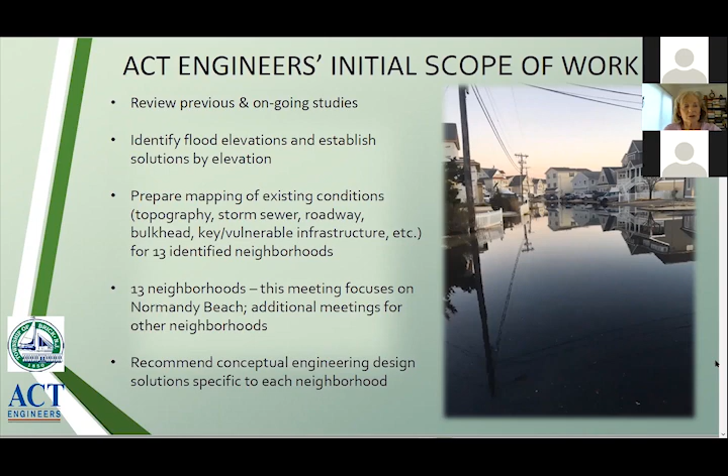So tonight's meeting is focusing on the Normandy Beach section of your township. On the next slide, you're going to see the 13 study areas that we're going to be focusing on for the township. And on the right-hand side of the picture, you see the areas specifically identified.

And now I'm going to turn this over to Jeff, who's going to talk more and further the conversation. This is Jeff Richter from ACT Engineers. As Carol indicated, on the left side of the slide, you can see the 13 study areas that we are reviewing.

Normandy Beach would be number 3 there. These are just in no particular order.

On the right-hand side is an aerial photo of the township. The areas outlined in yellow represent the 13 study areas, and next to each one is a number and/or a number with a letter that corresponds to the study areas listed on the left side of the plan. The areas in red are the low-lying areas of the township subject to flooding, in this case to a flood elevation of 1.4. I realize there is flooding in Normandy Beach at this point, but due to the large scale of this map it doesn't show up, as it doesn't in some of the other communities at this scale. So if we could go to the next map.

Jeanetta: You meant blue, right, Jeff? Jeff: The areas in blue. Sorry, what did I say? Jeanetta: You said red. Jeff: That's red? Okay, the blue areas, I'm sorry. Jeanetta: Thank you. Blue for water.

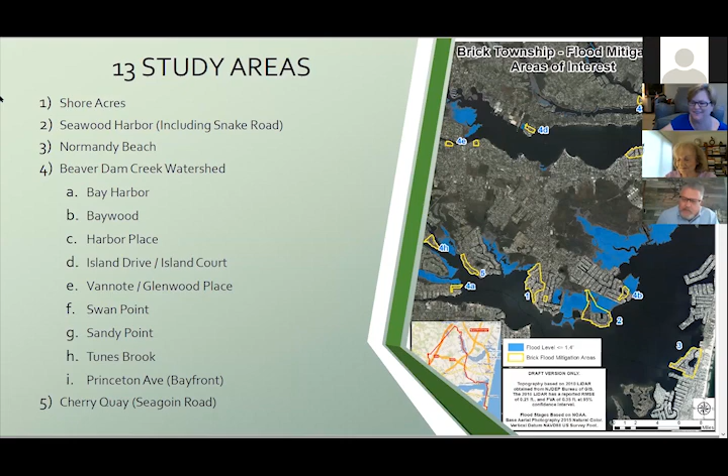Okay, next slide. The next slide shows two of the data sources I'm sure the neighborhood is familiar with: Stevens Institute of Technology and NOAA, which is put out by the National Weather Service.

I wanted to go over this slide so we can understand what datum we're talking about. Datum refers to topography, what datum you're using for your topography. The Stevens Institute of Technology datum is NAVD 88, which is the current datum used by surveyors throughout the state when collecting topography, staking out new infrastructure, and so forth. It's the recognized datum for surveyors.

The Stevens Institute of Technology uses that datum for their flood gauge information. The particular gauge shown on the left is from Stevens Institute from this past few days. You can see it was 6:10 through 12 o'clock today, I believe. The flood height in red is the confirmed, observed elevation, and it's under 2 — actually 1.76, and I'll tell you how I know that when we review the next one. The purple is the projected, and the gray is the uncertainty in the projections.

Now the NOAA gauge on the right — they're both from the same gauge, both taken from the Mantoloking gauge on Barnegat Bay. The only difference is NOAA reports it based on a gauge elevation of 0, which is different from NAVD 88 by 0.4. You'll notice both say major flood, moderate flood, minor flood, but they're off by 0.4 feet. So if you're looking at the NOAA gauge in reference to NAVD 88, it's going to be 0.4 less. You can see it says for today the peak was 2.16 feet on the NOAA gauge, but in surveyor's terms, NAVD 88, it would have been 1.76 as shown on the graph on the left. I know that might be a little confusing, but I want to make sure everybody understands that for tonight, everything we're going to show as far as conceptual is based on NAVD 88, and what you experienced today was roughly 1.76 in that datum.

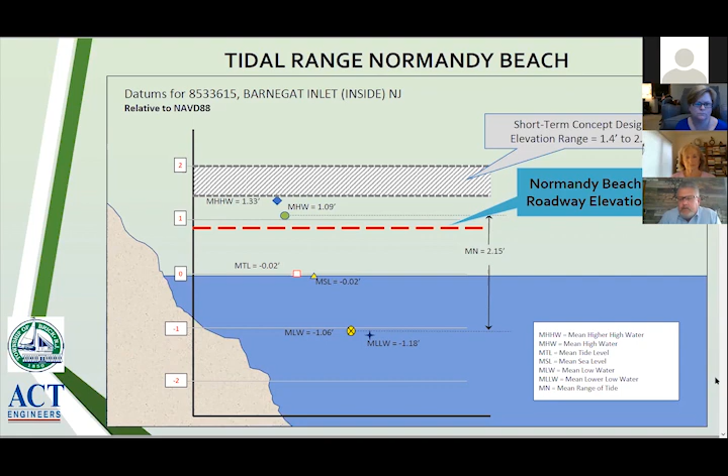So if we could go to the next slide. This shows generally the tidal range for Normandy Beach. You can see the mean high water is 1.09 feet, and the mean higher high water is 1.33 feet. At Normandy Beach, the lowest road elevation is 0.85 feet. So you can see that even at mean high water there's flooding in the street. For what we're looking at for the short-term conceptual design, the elevation would be 1.4 to 2.0 for any infrastructure to get above the mean high water line. Again, these elevations are all in NAVD 88 as we just talked about on the prior slide.

So we could go to the next slide, Janelle. This slide is also taken from the Mantoloking tide gauge. Along the bottom are the years from 2006 to 2020, and along the left side vertically is elevations, again in NAVD 88. The blue represents the fluctuation in the tide, with the high tides peaking at the top. The peak of the low tides is below the 0 line in some cases, but that's not relevant for flooding. As you can see, we've highlighted across the top several of the peaks that have occurred and the dates they occurred. I'll show you later data that shows they're occurring more.

There is a gap you'll notice between the end of 2015 and the beginning of 2017 when the gauge was out of service. This also doesn't represent any significant storms that occurred during these periods. Once the gauge is taken out of service, or they don't post the readings because of the potential for error, there are some other storms, like hurricanes or Superstorm Sandy, that just aren't shown on this, and they obviously go above what the highest storm is.

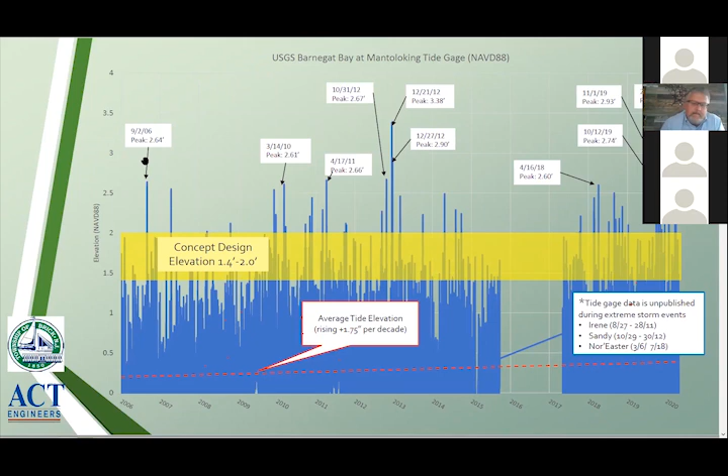You'll notice from the peaks here that the peak on 12/21/12 was 3.38, just under 3.5. That was right after Sandy. Sandy was up around 7 per some of the information, just for your records. The tide elevation rises roughly 1 3/4ths. Based on this data, the average tide has risen roughly 1 3/4 inch per decade. Next slide.

Jeanette, okay. All right, so in our review of the neighborhoods, we did a community flooding impact assessment. We've got two tables here. The first one, let me define: you'll see in the tables the heading with the numbers below it says number of dwellings with compromised access. What we mean by compromised access is dwellings that either have water in front of them on the roadway, or would have to travel through a flooded roadway in order to exit the neighborhood. So you could be in a portion of the neighborhood that's dry, but if you have to drive out through flood to get out of the neighborhood, you're considered compromised access.

Taking that into consideration, we looked at the impacts less than or equal to a flood elevation of 2.0 feet, again NAVD 88. Our short-term design approaches would address under less than or equal to a flood of 2.0. You see Normandy Beach is listed number 2 there with 153 compromised access. On the right is the long-term design approaches for impacts greater than 2 feet, up to a 3.4 foot flood elevation. Again, Normandy Beach is number 2 there with 198 compromised accesses.

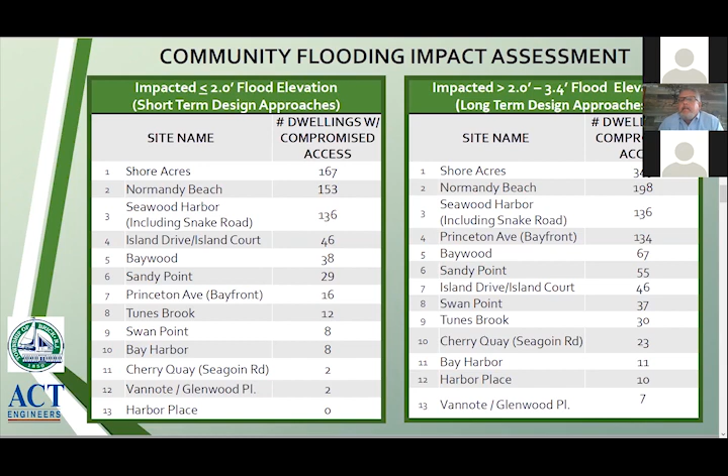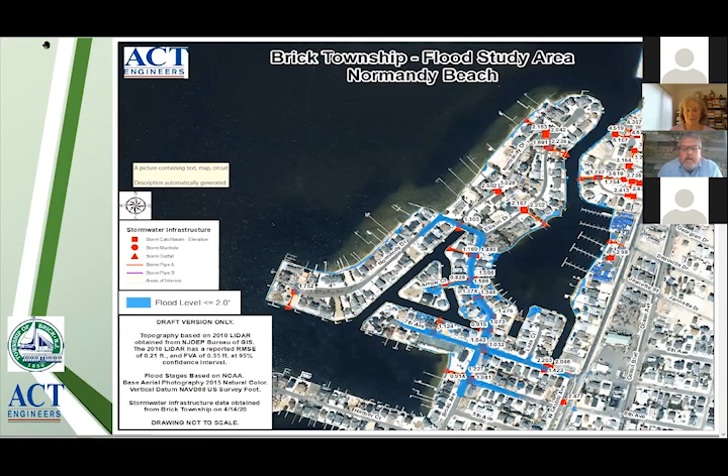This is basically the same slide with the flood elevation of 2.0. The yellow represents the low-lying roadways that are below elevation 2. Again, 2 is our projected design range.

Alan Rothman, 318 6th Avenue: My question is, the roads that you're talking about raising on this slide would be the roads in the yellow? They would be the roads that are low-lying and to get above flood would need to be raised. So the ones that are highlighted in yellow on this slide? Yeah, to get above 2, they would need to be raised. They're the low-lying roads.

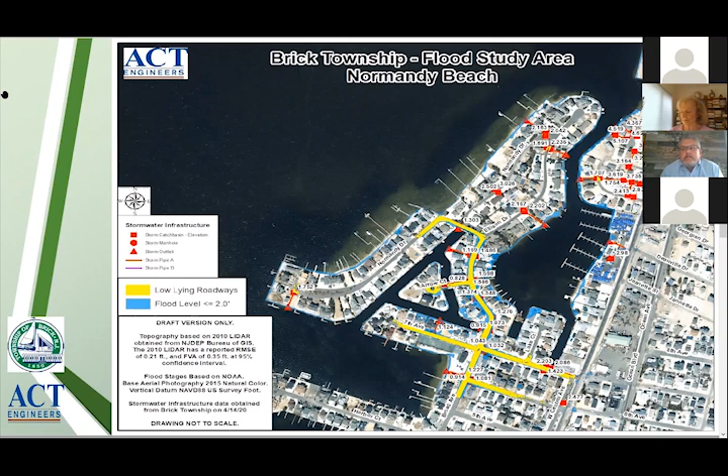For conceptual mitigation design approaches, the short-term design approach would be to design to elevation less than or equal to 2. That flood occurs approximately 1,500 plus or minus hours per year at that elevation. To address that, conceptual mitigation measures would be to install check valves, raise roads, sidewalks, driveways, handicap ramps if that portion of roadway or sidewalk was raised, raise select bulkheads, and install additional drainage infrastructure where necessary. Under the long-term design approach, this would be elevations greater than 2, above the yellow line shown on the other slide. It floods above that approximately 60 hours per year. Long-term design approaches would include raising roads and properties, raising bulkheads, installing additional drainage infrastructure, and possibly pump stations.

Rich Morano, 548 Broad: Could you give an example of additional drainage infrastructure? Additional infrastructure could include adding additional inlets, replacing or increasing the size of pipes - those types of measures, because when you raise the road, you may need to add additional infrastructure to pick up the water at more locations, since a lot of the areas are flat and there's not a lot of pitch.

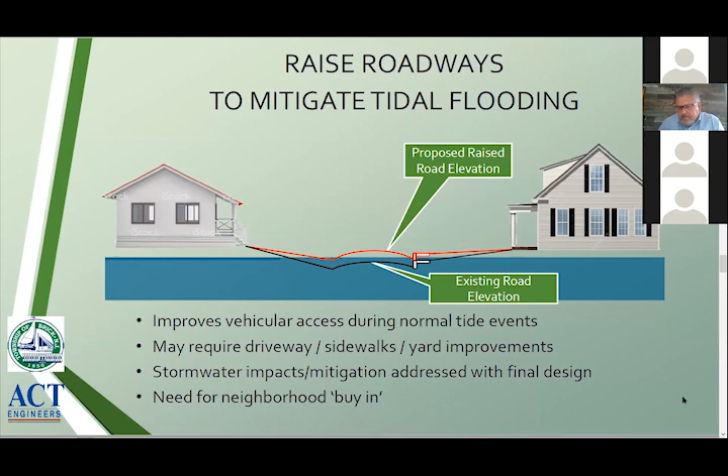Okay, next slide. So, one question here. Sure, who's asking? It's John Armstrong.

Hi John. So does that mean, since different properties have different current elevations, the raised road would be designed according to the adjacent properties? So it would be higher in some areas and lower in others, so you don't inundate those lower properties. Is that what you're saying?

Yeah, there's going to be a limit to how high you can go if you have properties that are very low. That would have to be worked out at final design. There might be ways to address that in the design.

Well, you might have to raise a portion of the property. You might have to create swales or something to get the water to go around the home. It would really need to be looked at closely. The best solution would be to raise the garage or dwelling. It seems to be more the garages that are lower, more so than the homes.

The next one is just, the slide just shows... Excuse me one minute, this is Stephen Timoni again.

About the water coming up from the groundwater, has that been determined by anybody at the township or by your engineering firm? Are we experiencing ground level water coming up? We have not investigated that. That was not part of our task. Wait, that's not part of your work order?

Part of our work is to come up with conceptual designs. That would be part of a design, investigated as part of a design. Okay, well if anybody understands that, they're smarter than me. Wouldn't you come up with a conceptual design after figuring out the source of the water? So you would have to know whether the water's coming up through the ground, why, before you create a solution. We're proposing conceptual solutions that would need to be investigated further based upon additional surveying and geotechnical information. Wow.

So basically this is a schematic drawing that we're looking at, okay yes. So we are years away from any type of solutions that will have any future impact on the neighborhood. I can't answer that. The results will.

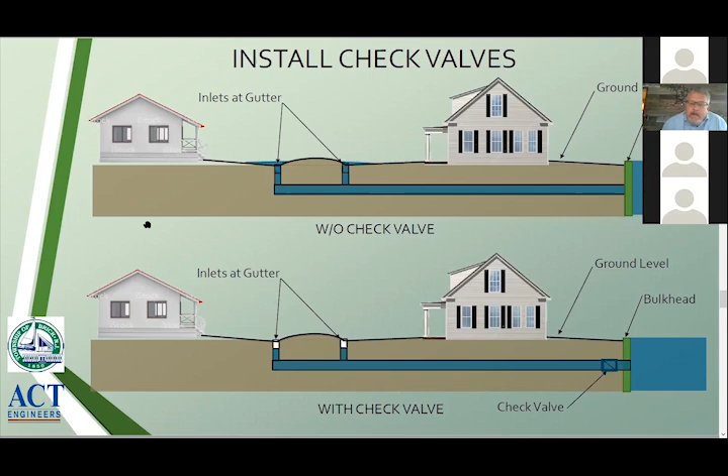It appears to do that. We don't have elevations on all the bulkheads, but it only takes one area. Go back to that slide—3.4, way at the beginning. That's why we picked 2 as a design elevation to get the roadways elevated. This is what it would look like at 3.4, which it's gotten close to in the last 14 years.

So in the last 14 years, a pretty good span in most people's lives, accounting for hurricanes, the bay has only breached the bulkhead one time? Well, I don't know if it could have been more times, because there are some low areas—we don't know how high the bulkheads are.

Has water ever encroached upon the tennis courts here? Why are you asking him that question? I don't know. Has water ever encroached upon the Bay Beach house here? No, not even during Sandy. So why then, if you're not having water encroaching over bulkheads onto the Bay Beach house—well, let me ask you this.

Has anybody from your company been in this neighborhood? Any of the partners in the company? Carol, have you been here? Absolutely, Carol's been there. And so has the president, Rob Corkage, and some of our other crew. It's just that Jeff is a master designer and an engineer, but he has not had the opportunity.

That's fine, I just wanted to know if anybody else had been here. So one time in 14 years the bay water has breached bulkheads at the beach, but many, many times I have water on my property, approaching my front steps and my garage. I own one of the oldest houses—it was built in 1926, and we didn't put it on stilts.

But I still have water around my property all the time. The storm drains are filled to the top every single day, 365 days a year. So they don't have any pictures. This doesn't have anything to do with the fact that the storm drains might be ineffective right now.

They clearly are, you moron. Jeez. Somebody should mute themselves. Did somebody just call me a moron? Sure. Where's the third one? I get cut off and then somebody calls me a moron, okay?

So I still have water in front of my house, and I've had water in front of my house for the past 7 years, okay? And nobody's done a damn thing to correct it. And I don't hear a plan to correct it. I hear a plan to raise roads that's gonna make water come into my house, okay, and continue to have storm drains that are ineffective. We have evidence today, by admission, these storm drains don't work. The water does not drain out into the bay. Why do we still have these storm drains? Please explain that to me. Because you know what? Maybe I am a moron.

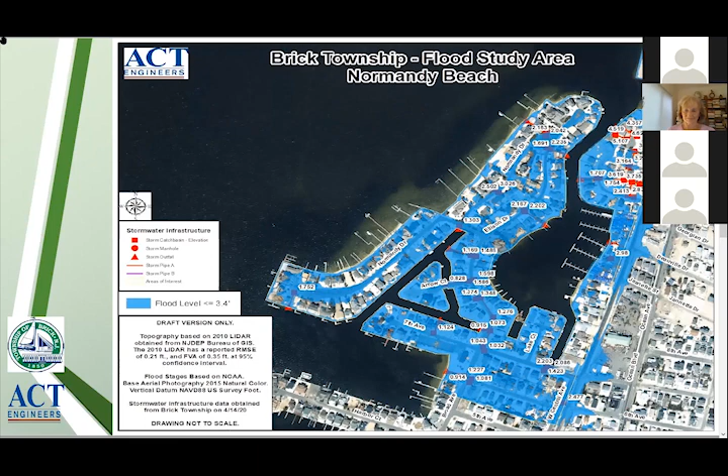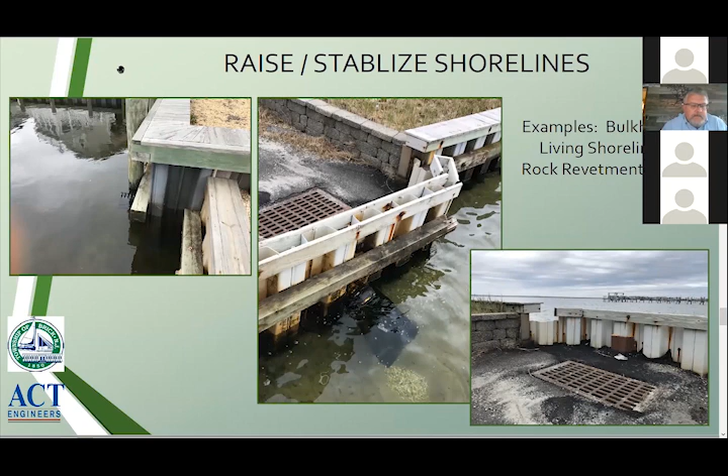Excellent. These are some of the bulkheads where you've got some breaches. You've got different heights of bulkheads. There's a low spot in the bulkhead, that's at the end of Normandy Drive, I believe, at the curve. So some of the solutions could be to improve the bulkheads, living shorelines, rock revetments, or et cetera. Next.

Carol? Okay, so what our next steps, and we really have presented solutions here that are what we're terming short-term, or solutions that can help out in the near future. We certainly are very much aware that there's a long-term plan for dealing with flooding and mitigation. But what our task, meaning what we're looking at right now, are some short-term relief for the residents of Normandy Beach. And as Jeff said, we're going to need to collect more topographic information for mapping on specific areas.

We're going to, as was strongly suggested, identify and pursue more funding sources for Brick Township. And funding sources include going to the Army Corps, trying to get money from FEMA, working with New Jersey Office of Emergency Management, and NJDOT with some of their local grant programs, which is being used on a shared service with already you guys are doing with Toms River. So obviously securing funding and working on those kinds of budget items are something that needs to move forward. We're going to also be presenting some recommendations for revisions to the township ordinance for future design standards. And we will continue to make sure that we coordinate our efforts with what Toms River is doing in your area, and then developing strategy and allocating funds and implementing, meaning moving forward with the design, with the permitting and the construction as this moves into the actual design stage.

Okay, so if we remember back - Jeanette, if you could go back to the inundation mapping of Normandy Beach - there are two images here intentionally chosen. The first image, go back two more, okay - this is intentionally chosen because the flood elevation shown is water backing up through the storm drainage system, flooding from the roads to the properties. That's what you're seeing most of the time, and this is the situation we're looking to alleviate in the near term.

If we advance this and go to the next slide where we're at 3.4, what you're starting to see - one more, there you go - is that inundation is not only coming from the storm drainage system, but it's actually inundating up and over some of these bulkheads. We don't have exact elevations on these bulkheads, so I can't tell you exactly which ones it's coming over, but it's coming from the bay directly onto properties and then combining with the water coming up through the storm drains. So we've got 2 problems going on simultaneously.

One of the long-term solutions, which get to this higher elevation of water, is going to be much more complex than solving the storm drainage system, which is what's been proposed with the check valves and the pipe cleaning and verifying. So what the township has been doing with checking all of these pipes has been exactly the right thing to do, because we can't tell you the check valves are going to work unless the pipe's in good condition.

Once we put these check valves in, what we need is a differential, a positive pressure from the land side to the bay. As soon as there's a differential, and the water on the land is higher than the water in the bay, stormwater and bay water will start to drain from the streets, and that check valve will open and allow that to happen.

So you've got two things going on, and that's why we tried to break it, where we were solving a good percentage of the routine flooding coming through the roadways at a cost the township can manage. At this point, we're trying to break it into two pieces where we're solving as much as we can with the resources available. So these two images were intentionally chosen to show exactly those two things going on.

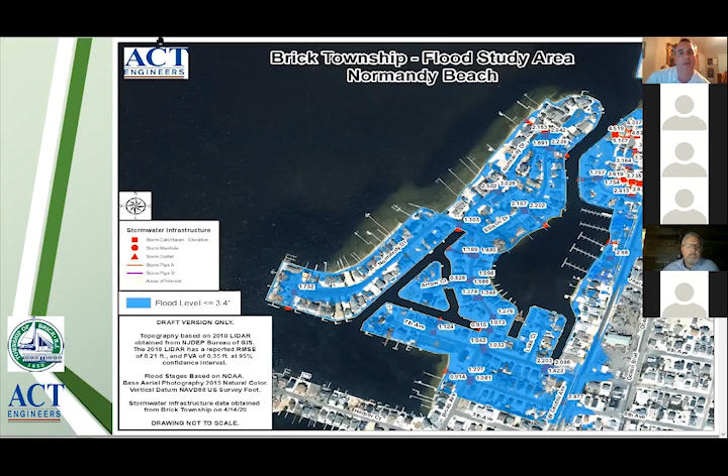Eric, looking at this map, the elevation numbers shown, are those property elevations or street elevations? Those are catch basin elevations, the actual catch basins in the streets. Is that the invert of the pipe or the elevation on the grate? That's the elevation on the grate.

Thank you. That's part of the question of additional data that we need. Again, we're working with aerial topography. I don't know what the invert of these pipes are in all situations, so to get to final design, we have to know some of that additional detail information. Are you working on getting that information? We are working on trying to figure out that information. That's taking this project to the next step. But right now we're giving you concept level solutions.

But you've been retained to get that and bring it further along. We are working with the township on that, yes.

I have a question again, going back to the township on the flapper valves. Joanne, you mentioned one valve has been installed for over a year and you've had success. I don't recall the street, but that street, I believe, is not on the barrier island, is that correct? That's correct. So they don't experience the problems we have with sand and other debris going down into that valve on a regular basis, correct? I wouldn't say that. Alyssa, would you agree? No, it's a beach.

It's on Van Note Drive, and if you look up at the end of Van Note Drive, the property's a beach. So they do have as much sand coming. For example, where you had the valve over by Bay Beach, it's all sand, and there's sand regularly in the road there that's never cleaned out. So that catch basin is constantly absorbing sand.

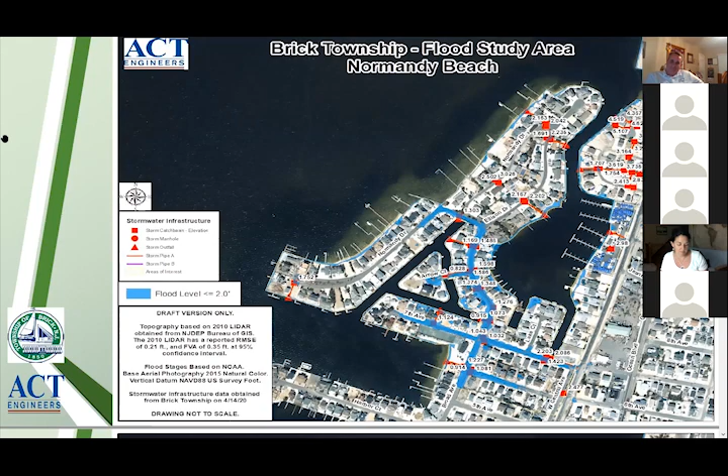All right, is there anything, any other questions from anybody here? I apologize, is there any other questions from the folks in Normandy? Yes, hi, this is Eileen Morano.

Hi Eileen, would it be possible to get a copy of this presentation? Yes, so the presentation I will send out to the Normandy Beach Community Group email I have, but also this meeting, the video of this meeting, including the presentation and the questions asked and answered, I will send everybody a link to that. So for any of your neighbors, or if you want to sit and watch it again if you feel you missed pieces, I'll send the link also to the Normandy Beach Association group. That would be great.

Are there any specific actions that you would like the Normandy Beach residents to take in the immediate future? For instance, I have video and pictures going back to 2016, none of which I've loaded or forwarded because I didn't want to overwhelm you with the amount of pictures. Are you still looking for pictures? Would you like us to send video and pictures, or do you think you have enough?

Well, I don't want to speak for ACT, I don't know if ACT was still looking for data. Yes, I think, as Carol had indicated, if you have pictures, especially if they have... we really need to have a date on them, so then we can go back and look at the tide from that day. And then we can get an idea of the flooding and match it up with the elevation of the tide from that day. So even if you take photos, if you could, when you send them, include what day and time you took them so that we can get a better understanding of that.